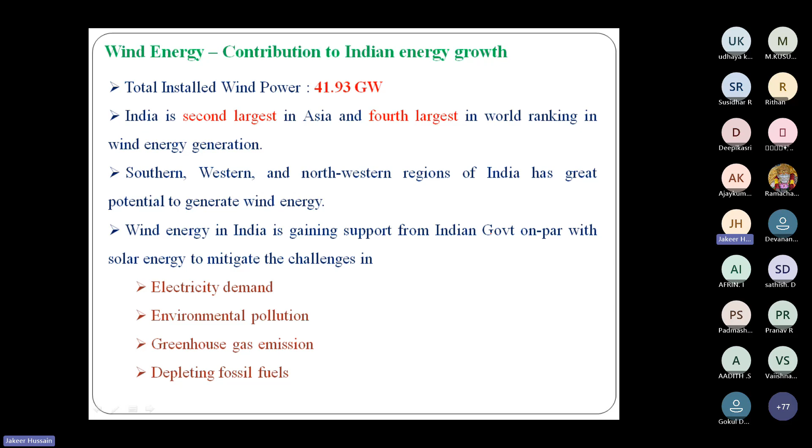We know the principle of the generator: it converts energy from mechanical form to electrical form. Whatever energy we get from the generator at the output port is unregulated electrical energy. What does unregulated electrical energy mean? It is purely based on availability of wind, and we know that wind flow is not constant, it is an intermittent source. So if the source is intermittent, the energy output also is not constant, and that's what we call unregulated electrical energy.

That unregulated electrical energy cannot be fed directly to our loads. So we need to modulate and regulate that energy according to the specifications of the loads, and for that we need a power modulating unit. We know that power modulating units are power electronic converters, and these converters regulate the electrical energy before feeding it to the electrical appliances, electrical loads.

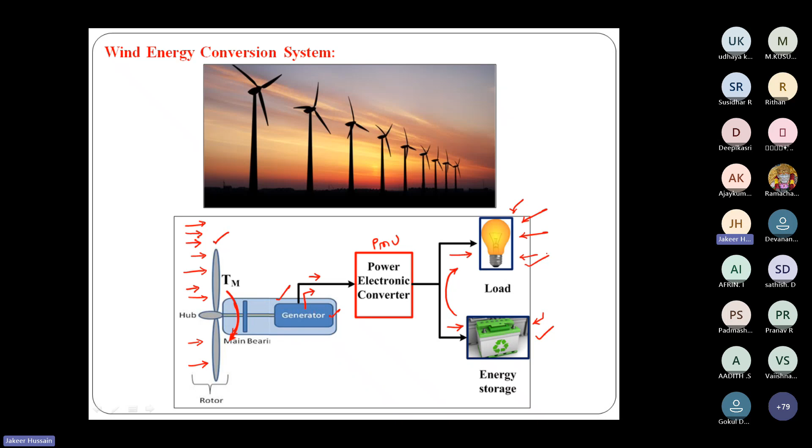These are all basic concepts. I know you may feel this is familiar, but I want to make you comfortable with these before diving into the actual wind energy conversion concept. So this is the basic of the wind energy conversion system, the main subsystems inside. Now we will see exactly what technology is involved in the energy transformation, the energy conversion process.

I hope you notice the structure of this device, it's a peculiar shape, just one object. If you place this object in any fluid flow, fluid meaning maybe liquid or air or gas, if you place this particular object to allow the fluid, the air, to pass onto the surface of this airfoil, this structure, then what will happen? Just guess, just visualize, just understand: what will happen if you place this shaped object in the air?

So the immediate effect is going to be this. Just observe: this particular structure has a leading edge, the initial point, and a trailing edge, the end point. Whenever air comes here, because of the obstruction at the leading edge point, these air molecules divide into two streams: one is the upper surface stream, another is the lower surface stream.

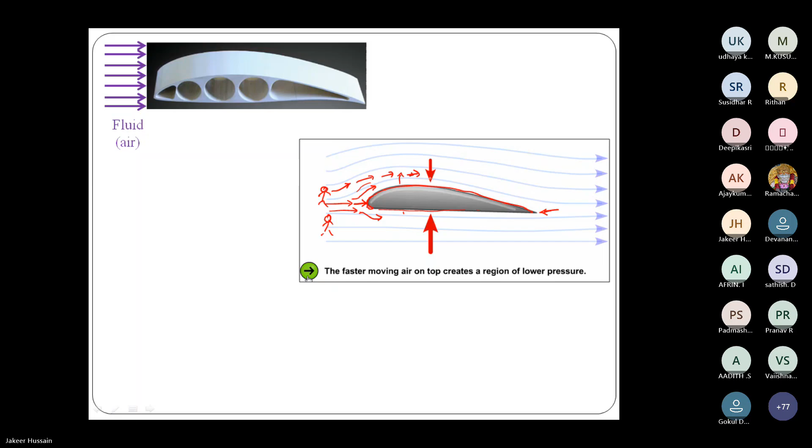But when you observe the geometry of this structure, at the upper surface, the length of the surface is somewhat more compared to the bottom surface length. This means that if air is dividing into two streams, the upper stream should travel more path compared to the bottom stream.

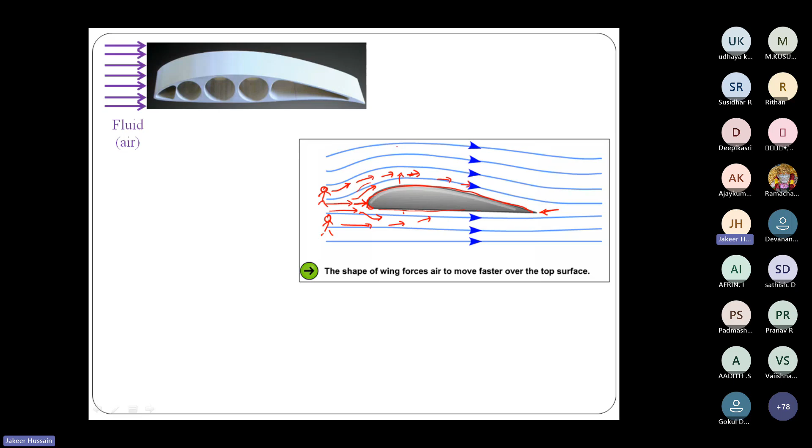But we have one concept, called conservation of mass flow. What is the meaning of mass flow rate? Whatever mass of air enters here, the same amount of mass will leave from here. This is called conservation of mass rate flow. It means whatever air particles enter at this point, all the air particles will reach this point at the same time. So the above surface particles and bottom surface particles will meet again at this particular trailing edge point.

So what it means is that these upper surface particles, to cover more distance, have to travel with more velocity when compared to the bottom surface air particles. So this is called velocity difference.

Whenever you create some velocity difference, obviously the pressure also will change above the surface and below the surface of the object, and it creates the pressure difference. We know that there is a relation between pressure and velocity: they are inversely proportional, inversely related.

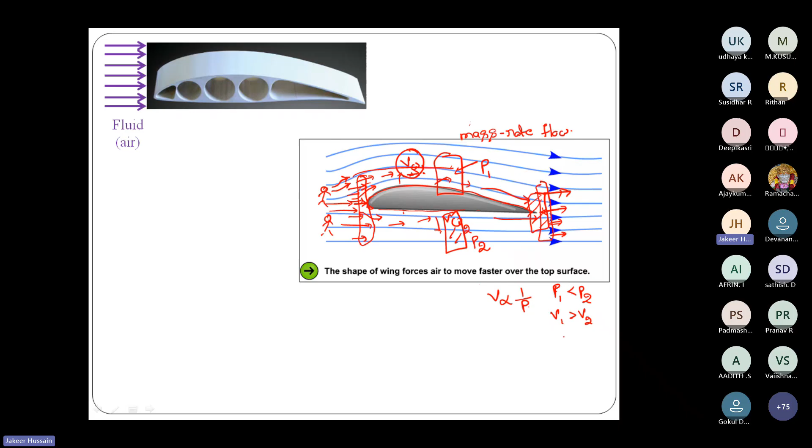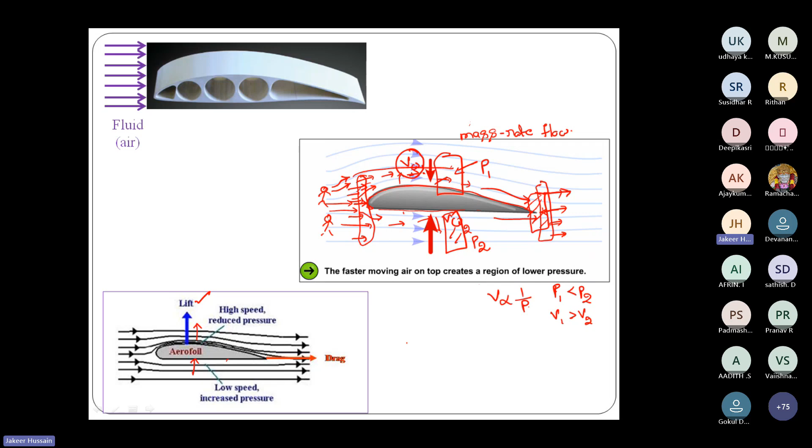This pressure difference will create one aerodynamic force, and that aerodynamic force we call lift force. How will that lift force act? We know that force will act from higher potential to lower potential. Because of that, this particular object will be lifted in the air, in the vertically upward direction.

This is the science behind this particular concept. So when you place an object in this particular geometry, whenever you allow some fluid to pass over this geometry, that object will experience some external force. That external force we call lift force, that aerodynamic force. The creation of lift force is very important in the generation of wind energy conversion systems.

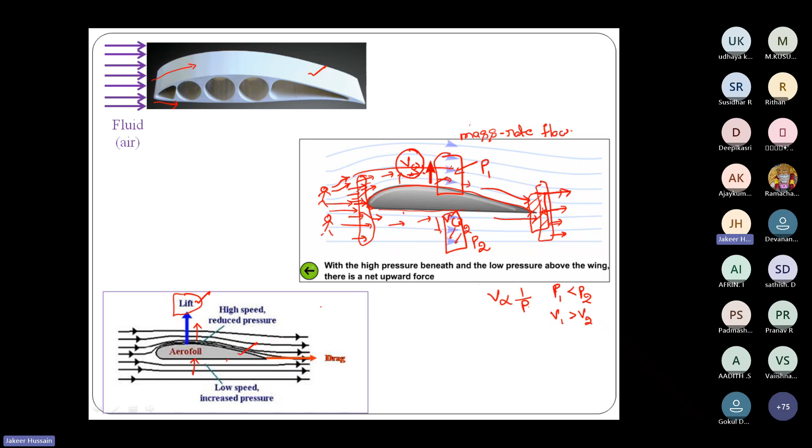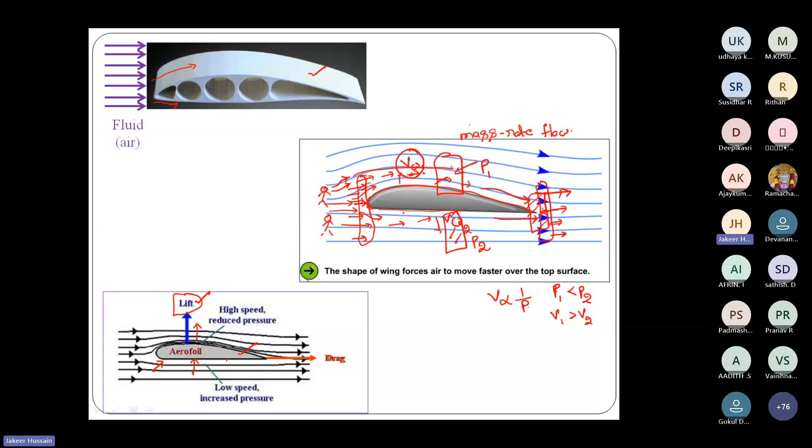I hope you can recollect that we use the same technology, the same concept, even in aircrafts. Whatever wing we design for aircrafts, all these wings are based on this type of structure. It's an aerodynamically efficiently designed structure, and that structure is called an airfoil.

So this is the definition of the term airfoil: it's a cross-sectional shape of an object that creates an aerodynamic force when a fluid is allowed to pass over it. A very simple shape, but that particular simple shape is revolutionizing entire engineering. That is the significance of this particular shape.

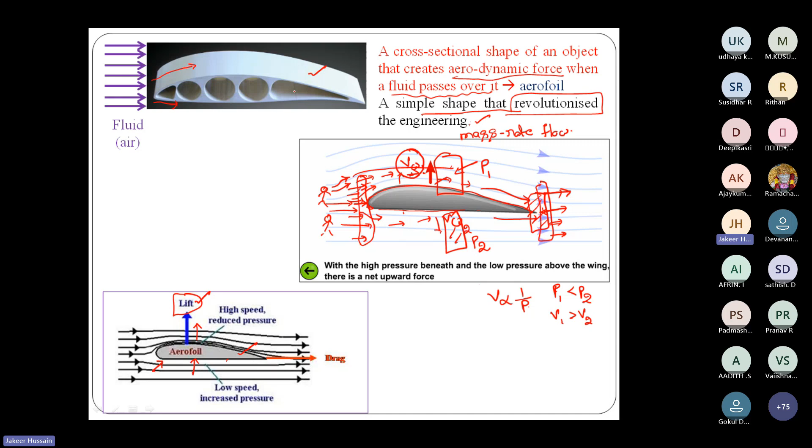So once you place that, it will create a pressure difference, and finally it will generate a lift force. This is a very important concept to enter into the wind energy conversion system technology.

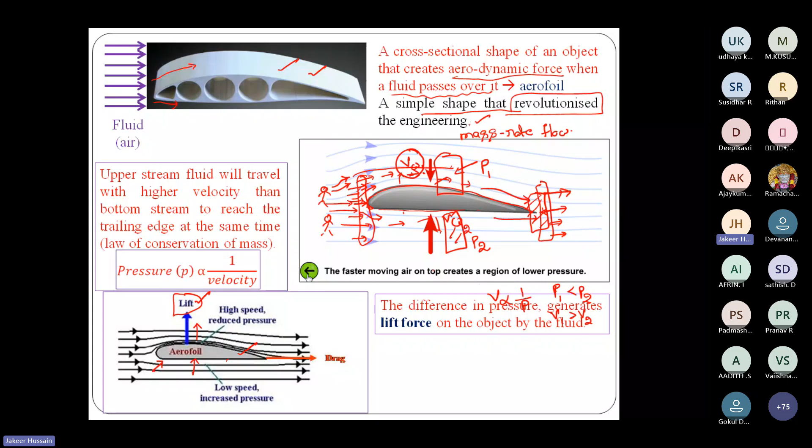Now that we understand what a lift force is, how can you make use of that concept at the micro level to rotate the entire length of the turbine blade? You can understand this from this particular slide. This is an aircraft wing, and you see the cross-sectional view of that aircraft wing is an airfoil shape.

So you can imagine a particular blade, whether it's a wind turbine blade or aircraft blade, is a stack of these airfoils. One wind turbine blade is a combination of thousands of airfoils like this.

When you place this blade in wind, based on the concept we just discussed, each airfoil will experience one external force, which is called lift force. Because of that lift force, all these airfoils, after experiencing their individual lift forces, the resultant force, the sum of all the individual lift forces, will make this turbine blade rotate or move down.

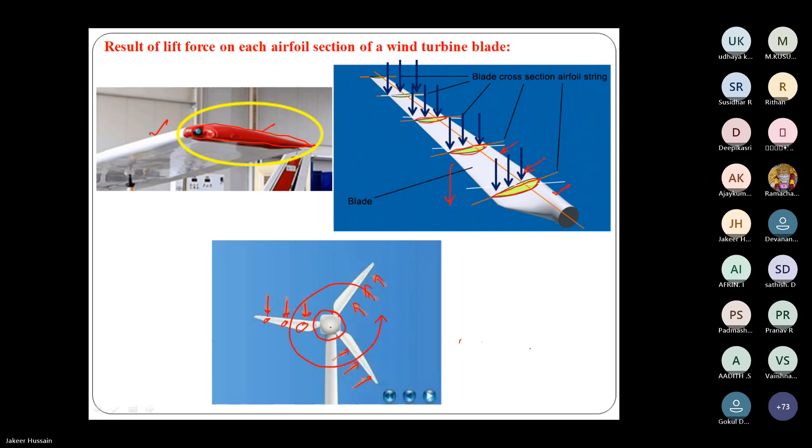What is the meaning of kinetic energy of the wind? We know that whenever wind is in motion, whenever there is some wind flow, it is because of its kinetic energy only. And what is the formula for kinetic energy? It is half mv square, where v is wind velocity and m is mass of the wind in kilograms. So this is the energy expression.

Then what about power available in the same wind? What is the relation between power and energy? It is the rate of energy that is called power. What is the meaning of rate of energy? It's dW by dt. The meaning of dW means kinetic energy I'm talking about, so it's d by dt of kinetic energy. So what is the formula for power?

It is half m dot. It is m dot, not simply mass, it is a rate of mass, the rate of mass, it is m dot, VW square. This is the power available in the wind.

Now something you should know about this mass flow rate. The formula for mass flow is rho A VW, where rho is called air density. The meaning of air density means how much mass in 1 cubic meter, it is kg per meter cube, that is called air density.

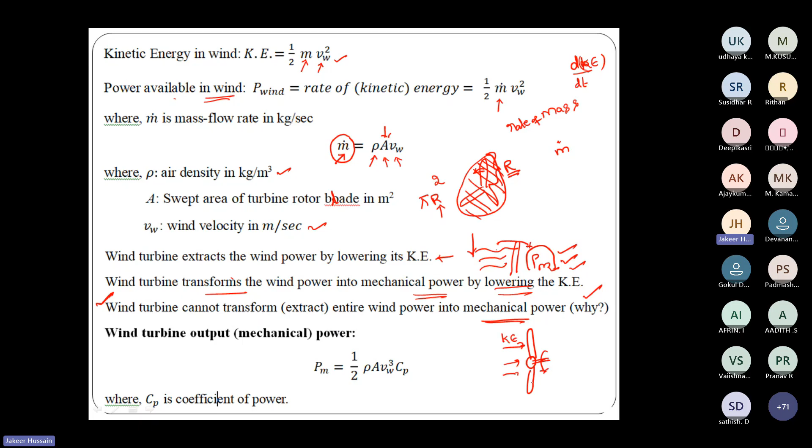Now this is a very important point you should understand. A wind turbine cannot transform the entire available kinetic energy in the wind into mechanical energy. Can anyone answer this question, students? Why can a wind turbine not transform the entire kinetic energy available in the wind into mechanical energy? Can anyone, just make it more interactive if possible?

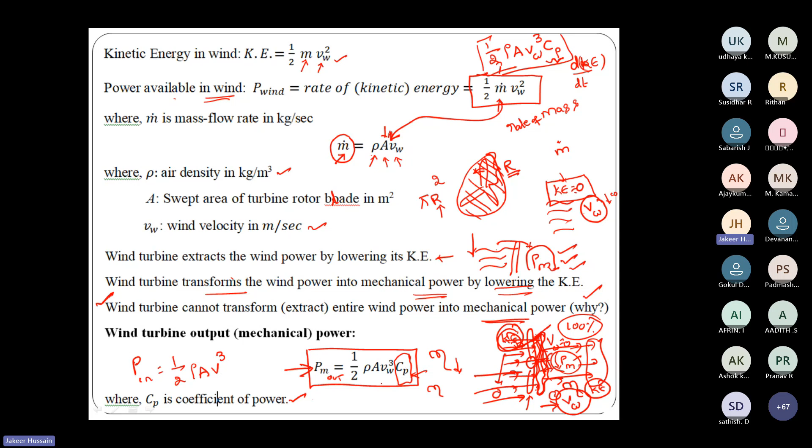So you should understand more about the term CP, coefficient of power. It is the ratio of wind turbine output power by wind turbine input power. There are a few concepts here — it is a derivation using the axial induction factor, alpha, called axial induction factor. But in this introduction lecture, I'm not going to discuss this alpha term. Just remember, there is a term called CP, coefficient of power.

And the maximum value of that coefficient of power is 0.593. Maximum value for that coefficient of power, or power coefficient, is 0.593, sometimes we call it 59.3%. So now you understand what 59.3% means: whatever input power is available in the wind, only 59.3% of that power we are extracting as output power. Maximum power you can extract from the input power is only 59.3%.

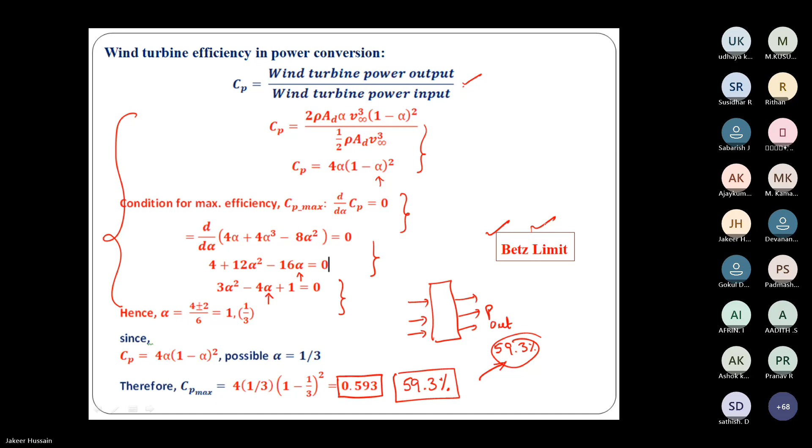This concept is called coefficient of power. So after understanding these basics, the expression for coefficient of power — there is one mathematical equation. That coefficient of power is a function of two different terms: one is called tip speed ratio, another one is called pitch angle. So coefficient of power is a function of tip speed ratio, which we call TSR, and pitch angle, which we indicate with beta. This particular expression will give you the value of CP.

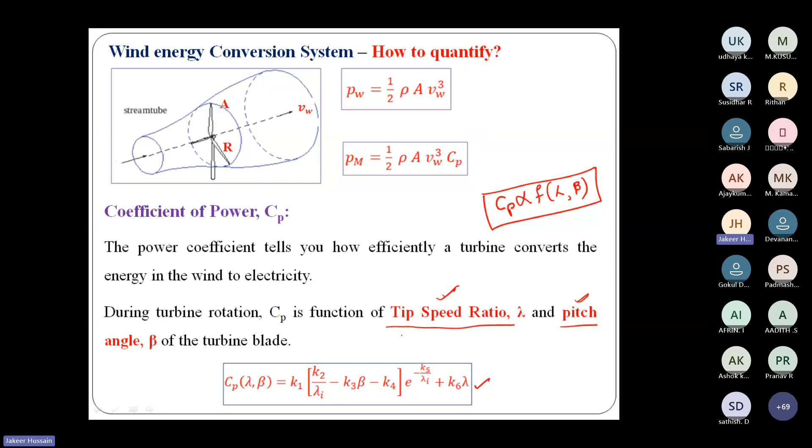It is a function of tip speed ratio and pitch angle. Now the question is, what is this tip speed ratio? What is this pitch angle? Tip speed ratio is a ratio of - when you allow the wind in this direction, the turbine will rotate with angular rotation. So if you take the tangential direction of that rotating blade, and that tangential direction wind velocity, the tangential direction speed of the tip of the blade - I'm repeating, the tangential velocity of the tip of the blade. I'm not talking about angular velocity, I'm talking about tangential velocity.

The tangential velocity expression is omega r into r. By the way, what is omega r? Omega r is nothing but angular speed of the wind turbine. And what is r? R is nothing but length of the blade. So the product of omega r into r will give you the tangential speed of the tip of the blade, divided by wind velocity. The ratio of these two terms will give you the TSR, tip speed ratio. This is a very important concept in wind energy conversion systems, so you have to visualize and understand this. What is tip speed ratio?

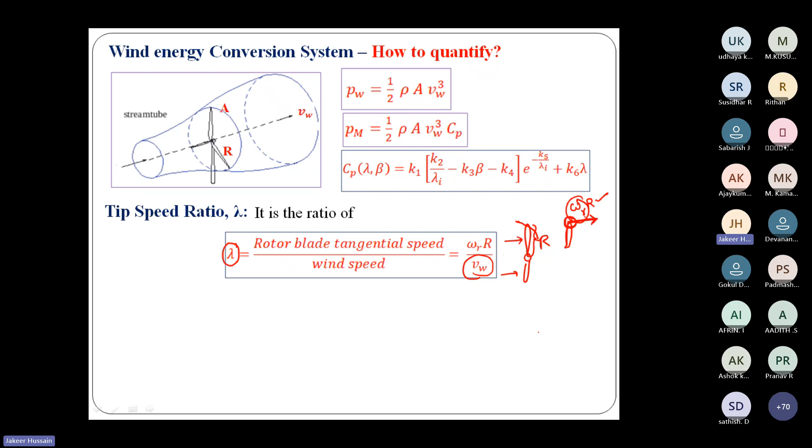Once you understand tip speed ratio, then what is pitch angle? This is a wind turbine - this is called hub, and these are wind turbine blades, attached like this. You can see this arrangement, where you can use a motor - this is our electric motor. This electric motor we can use to rotate this particular blade structure. You can rotate - rotation means not like our wind turbine rotation, it is a revolution. So you can make that blade rotate like that, only in this direction, not in this direction. So if you rotate like this, you can change the angle of that blade. That angle is called pitch angle.

To pitch, to rotate, to change the pitch angle of any wind turbine blade, we install a pitch drive motor. So just try to understand what is the meaning of pitch angle.

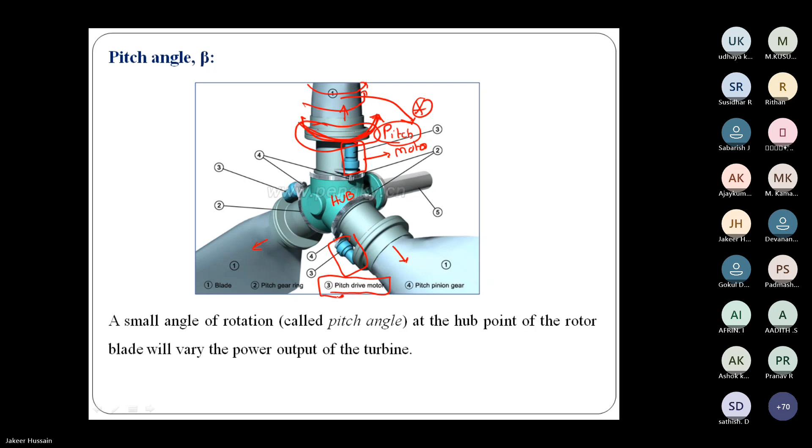Once you are clear about these two, here are the mathematical expressions we've discussed so far to model a wind turbine, wind energy conversion system. What is this? This is power available in the wind. And this is power extracted by the wind turbine. And this is the mathematical expression for coefficient of power - it is a function of tip speed ratio and pitch angle. And tip speed ratio is the ratio of the tangential velocity of the tip of the blade to the wind velocity. These are very important modeling equations if you want to simulate or work on a wind turbine.

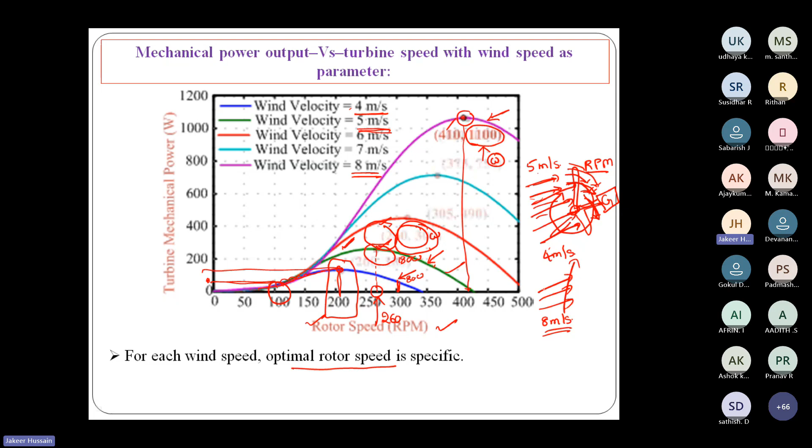So for each wind speed, there is one optimal rotor speed. It's a one-to-one relation. Whenever wind velocity changes from 5 meters per second to 6 meters per second, you should control the speed of the turbine to extract maximum power from the wind. This point is very important. That point will lead to the concept of maximum power point tracking.

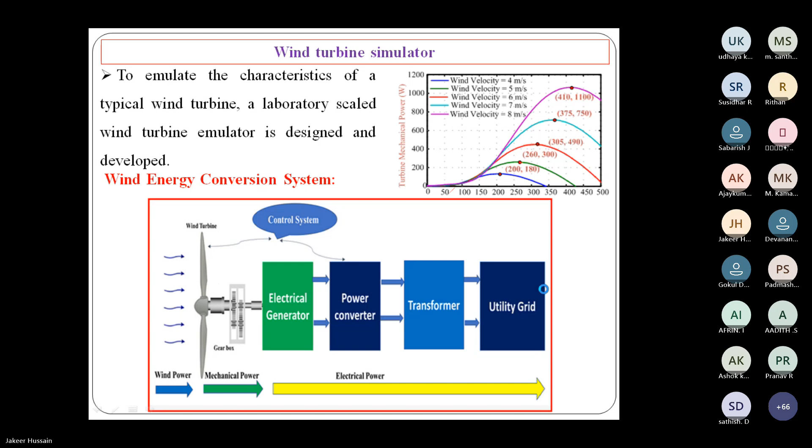Look at this. This is one hardware experimental setup. The experimental setup name is wind turbine simulator. What is the meaning of wind turbine simulator? To perform experiments, to conduct research on wind energy conversion systems, you cannot conduct research on real wind turbines, because when you conduct research on a real wind turbine, the incoming wind is not in our control. So to conduct research on a wind energy conversion system, you require constant wind speed for a certain amount of time.

Then only you can do some research. Then only you can propose the algorithms for that particular wind velocity. So the point is, whenever you want to perform any research or experiment on renewable energy sources, you don't do that research in the real field. You need to create one laboratory experimental setup to simulate, to mimic the characteristics of a real wind turbine. That particular setup is called a simulator. And this is the wind turbine simulator.

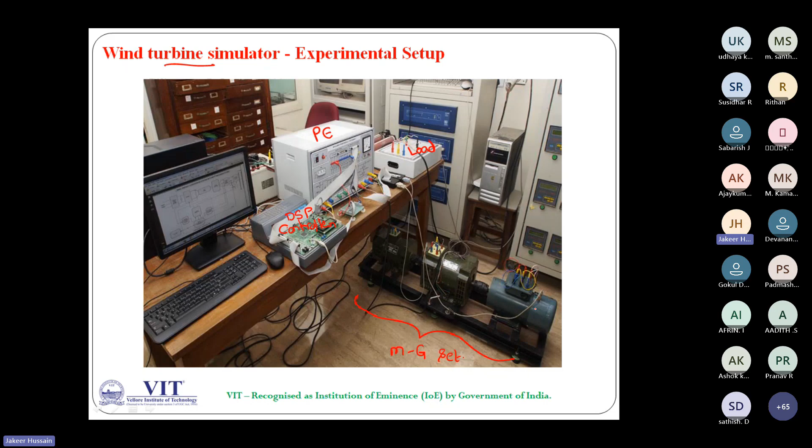So, this is called host system. What is the meaning of host system? In this host system, we will simulate the turbine. We will develop the control algorithm code, and that code will run on this DSP controller.

If you run the control algorithm on the DSP controller, it generates control signals, gate signals. Those gate signals you feed to this power electronic converter, and that converter's output is the input to the motor. So to control the speed and behavior of this motor, you need to control the power electronic converter's gate pulse sequence.

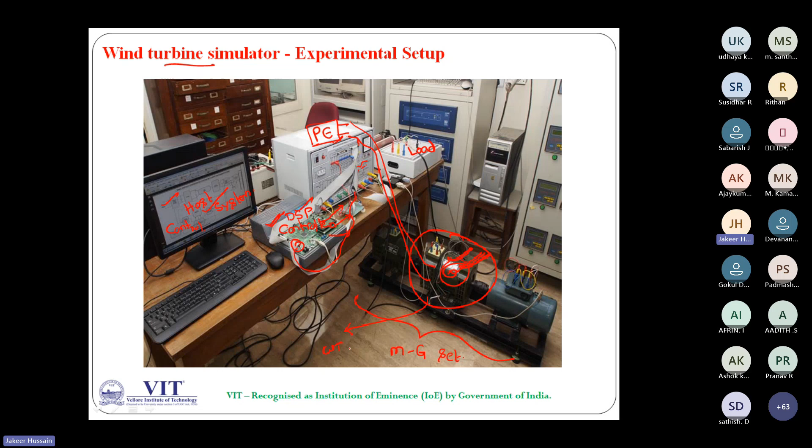So why are we controlling this motor? This motor will act as a wind turbine rotor. It behaves as if it is a real wind turbine, performing this type of characteristics. To obtain these characteristics, you should control that motor by using one power electronic converter.

So as if you have a wind turbine like this, the behavior of this electrical DC motor is the same as one wind turbine. That wind turbine shaft is coupled to the generator. So it is nothing but this PMSG generator, permanent magnet synchronous generator, coupled to one DC shunt motor.

This is the DC shunt motor. The DC shunt motor's main objective is to mimic the behavior of the wind turbine rotor, and the wind turbine rotor output is fed to the generator, called the PMSG generator. The output of the PMSG generator is fed to this electrical load.

So this is the experimental setup we developed in our laboratory to simulate the behavior of the wind turbine.

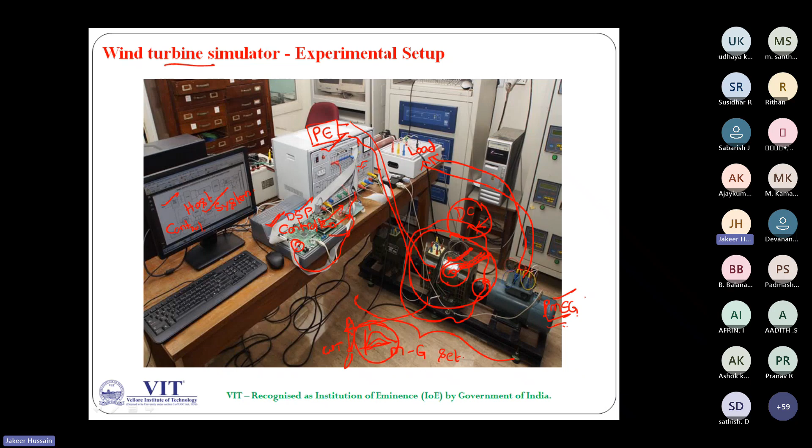But directly working on a wind turbine with hardware is not advisable. So first we need to simulate the behavior of the wind turbine by generating different control signals, and we should verify the performance of the wind energy conversion system through simulations. For that purpose, we need to develop simulation models.

So this particular window will show you the experimental results of that wind turbine simulator. Just now we have seen, at different wind velocities, the speed versus power characteristics. So these are the results of the hardware experimental setup.

So like I said just now, you should not start directly working with hardware. You have to work with simulation studies first, and for that purpose we need to create a simulation model that should implement one concept.

It is called the MPPT algorithm. That operation is called MPPT operation. What is the meaning of MPPT? It is maximum power point tracking operation, a tracking system, so as to extract maximum power from the wind.

What is the meaning of extracting maximum power from the wind? If wind velocity is 8 meters per second, then you should operate the wind turbine at this speed - then only you can get maximum power. If wind velocity changes to 6 meters per second, then you should operate the wind turbine rotor at this speed - then only you can get maximum power from the wind turbine. This process is called maximum power point tracking operation.

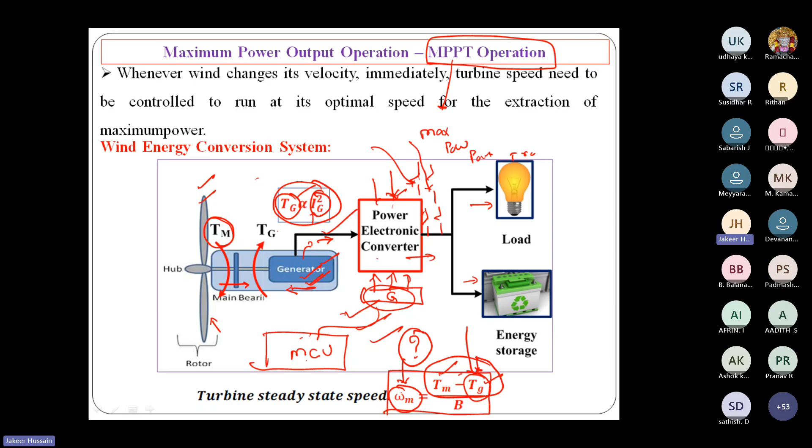This is the overall idea of a wind energy conversion system for MPPT operation. There are different algorithms available in the literature for maximum power point tracking.

Where does that maximum power point tracking algorithm come in this block diagram? Here it is. This algorithm will take the feedback signal, what is the wind velocity, what is the present speed of the turbine. Wind velocity is given by an anemometer, which measures the wind speed and feeds this information into the algorithm, along with the present rotating speed. Based on these two pieces of information, it will generate the appropriate control signals.

Those signals go into the power electronic converter. The design of this block is very important. That is what, as a researcher or student, you have to work on: how to propose, develop, and design a new MPPT algorithm, and how to implement it using a suitable control system.

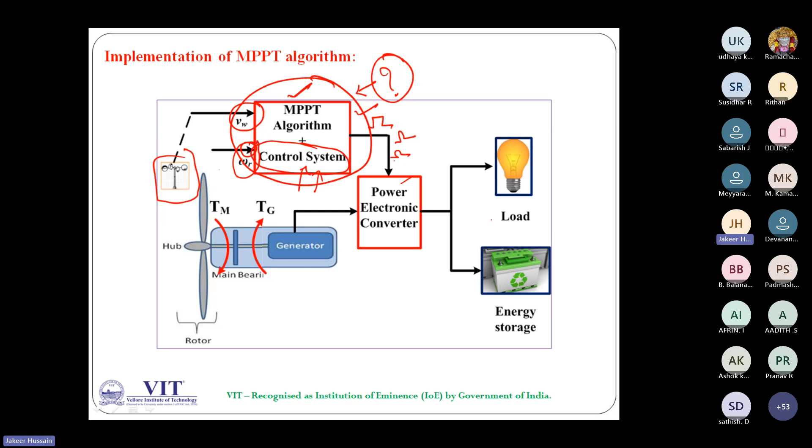As I said, there are many MPPT algorithms available in the literature, but conventionally three are very important: the tip speed ratio algorithm, the power signal feedback algorithm, and the hill climb search algorithm.

These are very conventional, popular algorithms. Nowadays people are going with ML-based algorithms, hybrid algorithms, adaptive algorithms, but all of these are derived from these conventional, primary algorithms. So you should start your journey with these: what is the TSR algorithm, what is the PSF algorithm, and what is the HCS algorithm.

One more thing you should know: the generators in wind energy conversion systems come with different topologies. Few wind turbines use permanent magnet synchronous generators, few use doubly fed induction generators, and very old wind turbines use induction generators. Most small power rating turbines use PMSG generators, while high power rating wind turbines use DFIG based generators. Nowadays we are not using induction generators; it is almost obsolete.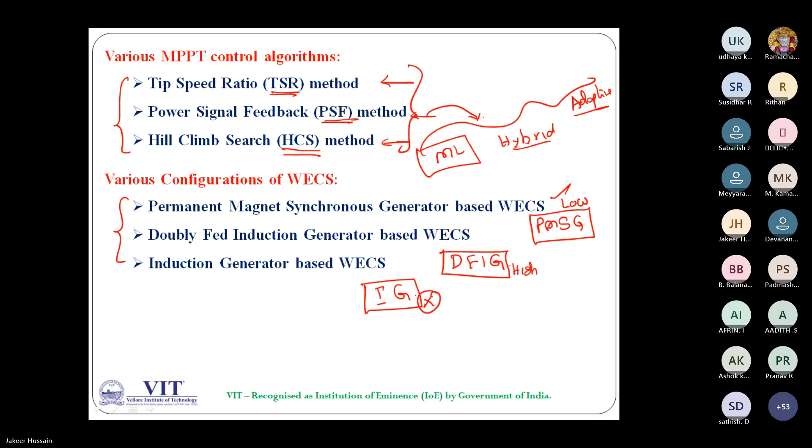So understand, DFIG based wind energy conversion systems or PMSG based wind energy conversion systems work like this. Now, to implement an MPPT algorithm on a DFIG based wind energy conversion system, here is the block diagram. This block diagram shows our turbine rotor connected to the generator, which is a DFIG generator, doubly fed induction generator. It has a stator and a rotor.

The stator winding you can connect directly to the grid, but the rotor winding connects to the grid through two converters, called the rotor side converter and the grid side converter. These are called back-to-back converters in the rotor circuit, coupled together and connected with a DC link.

So this is the power circuit, main circuit of our wind energy conversion system, DFIG based. But to control these two power electronic converters, you need to design a control system for the implementation of the maximum power point tracking algorithm. What is that control system? This is that control system, the remaining part, and the first thing is our MPPT algorithm.

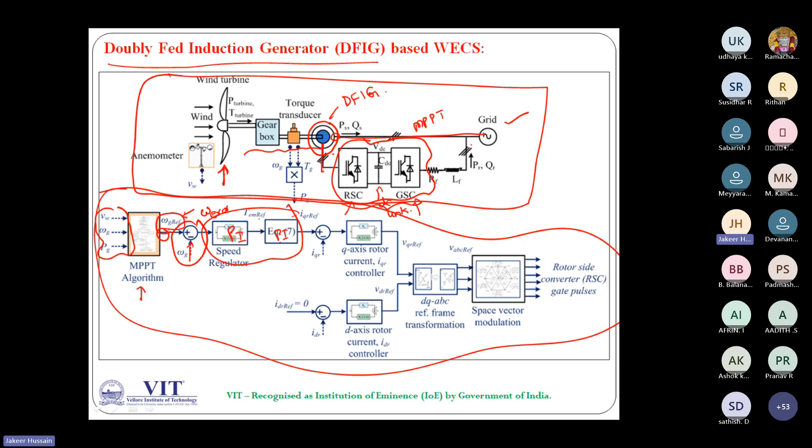For that purpose, we compare with the actual speed, present speed, and whatever mismatch we have, that error signal we feed to the PI controllers. From the PI controllers, there are two controllers we use: inner current controller, outer speed controller, and inner torque controller, outer speed controller. By using those two PI controllers, you can finally generate the reference signal for the rotor winding.

And that reference signal for the rotor winding, we perform the space vector modulation technique to generate the control signals for the converters. These control signals we feed to the converters.

So this is the simple view of a block diagram for a DFIG based wind energy conversion system with MPPT implementation. I'm not expecting you to know everything at this stage, but my objective is to make you aware of what is the main system, what is the control system, and what are the main important components in the control system. That is my objective, and that's why I explained it in brief.

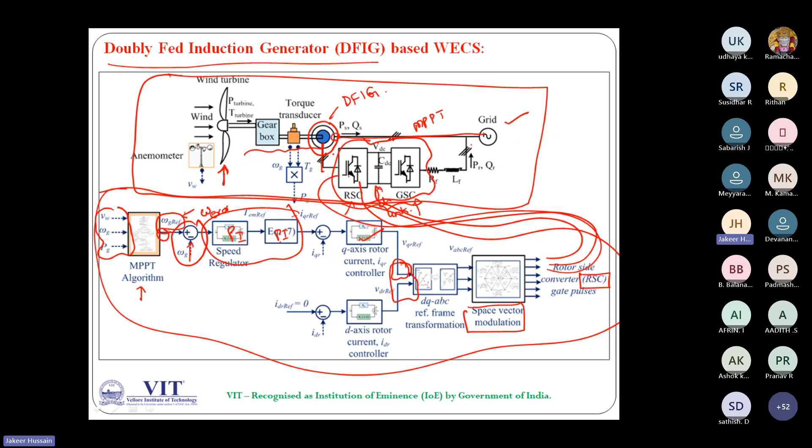So what are the things you should have in a block diagram of a DFIG based wind turbine? That particular concept you can implement on a MATLAB model. So this is a MATLAB model.

In this MATLAB model you see, first of all, the wind turbine, whatever mathematical modeling equations we developed. What are the mathematical equations we developed? 1 by 2 rho pi r square v cube Cp. This mathematical equation where Cp is a function of lambda and beta. These mathematical equations you have to implement in MATLAB.

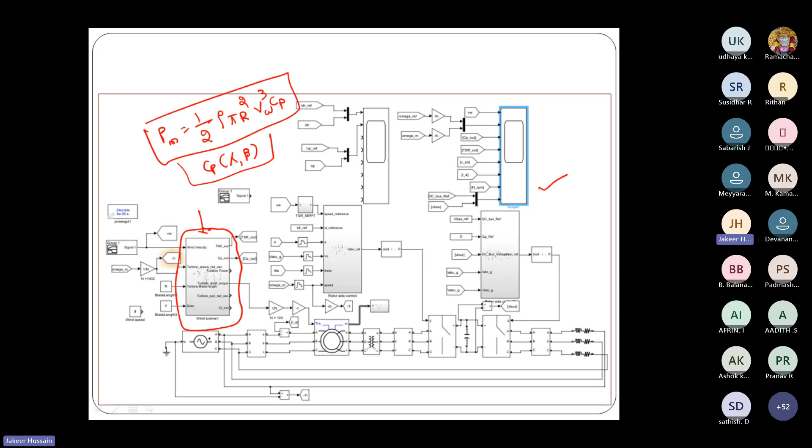Okay, so let me share my model. Here it is. Students, can you see my model on MATLAB? Yes sir, visible sir, yeah that's right. So this is the same model what I projected on the slide.

So this is what I said, the wind turbine model simulation equations, mathematical equations. If you double click on this, it will open the subsystem. In this subsystem you can see the implementation of all those equations: Cp implementation, Pm implementation, calculation of TSR. You just need to know the mathematical modeling equation, and in your own way you can implement it.

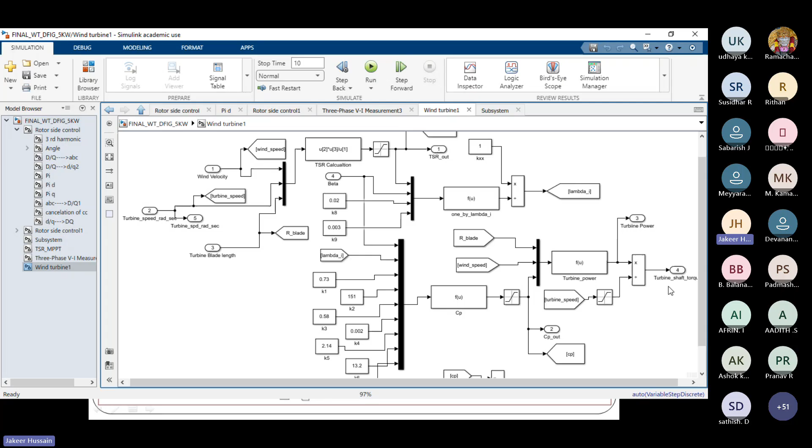You have different approaches to implement any equation in Simulink or MATLAB, so you can follow your own way. Finally, you have to make that subsystem give the output of torque. First you will get power, and knowing the relation between power and torque, you will get the torque output from the wind turbine block.

That torque output we feed to the generator. This is called the generator, and as I said, this is our doubly fed induction generator, which has stator winding and rotor winding. This capital ABC, I don't know whether it's visible to you, is the stator winding terminals, and this side, small abc, is the rotor winding terminals.

As I said, stator winding terminals are connected directly to the grid. Similarly, rotor winding terminals are connected to back-to-back converters: this is our rotor side converter, this is grid side converter, and this is the DC link. The grid side converter is connected to the grid again.

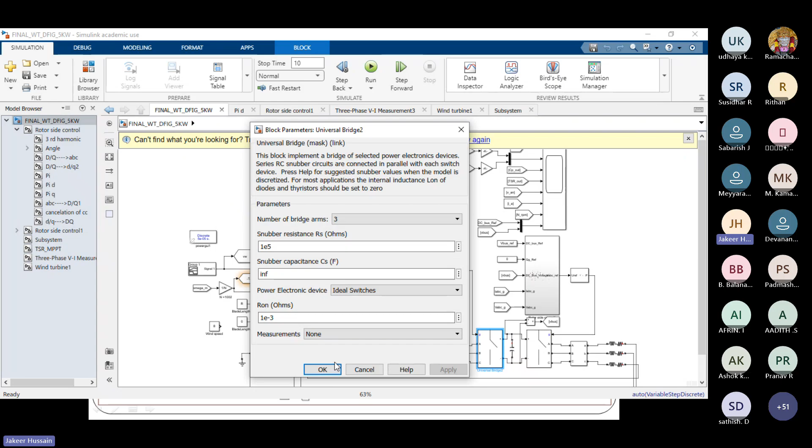So what is this power electronic converter? If you open the RSC, rotor side converter, you will see how to implement and design one power electronic converter in Simulink. You can take this universal bridge block to implement the rotor side converter, and similarly another block for the grid side converter implementation.

And how to generate the control pulses to these converters, you need another block. To implement and generate pulses for the rotor side converter, this is the rotor side control block. Similarly, to generate control signals to the grid side converter, you should have one more control subsystem for grid side converter control signals generation. So you will have two different subsystems: one for rotor side converter control and one for grid side converter control.

If I open this rotor side converter control, these are the main blocks inside it. As I said, you'll have two PI controllers: one is the inner current controller, another is the outer speed controller. Inner torque controller, outer speed controller.

After that, you implement transformations from the rotating frame to the stationary frame, DQ transformations. What is the importance of DQ transformations? It is to avoid the change in the inductance value, the change in the mutual inductance value. So everything should appear like a stationary thing. There should not be any rotating thing, relatively speaking. That is the objective of the transformations.

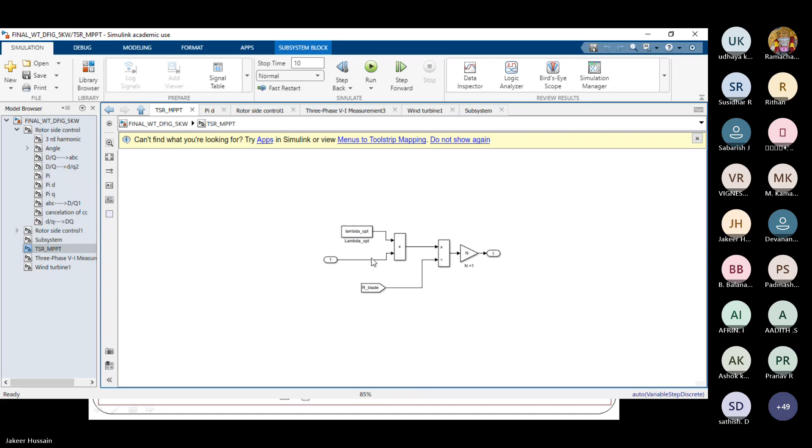To control this speed, here I have implemented the TSR algorithm. The input for the TSR algorithm is wind velocity. So take the TSR algorithm, implement it in this block, so that this block will generate the reference signal for the speed, called the speed reference.

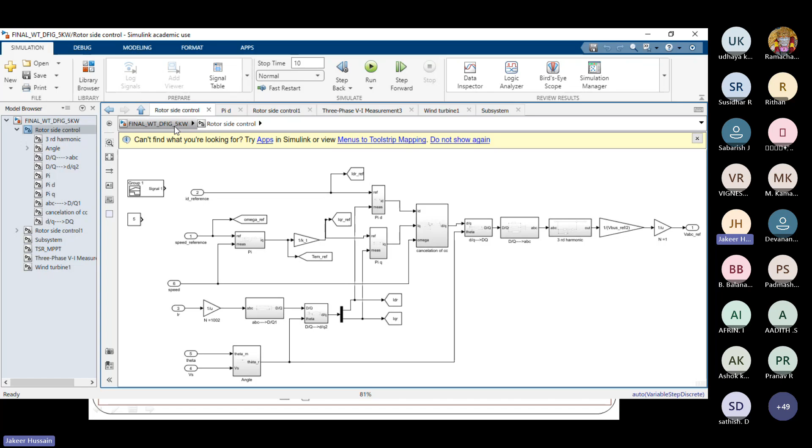With that speed reference, you have to design and implement our internal subsystem of the rotor side converter. If I get the opportunity next time, I'll be happy to share information on how to design the algorithm and develop the model. But this particular discussion will confine only to the introduction level. So like this, you can develop the control system subsystem, the control blocks for rotor side converter control.

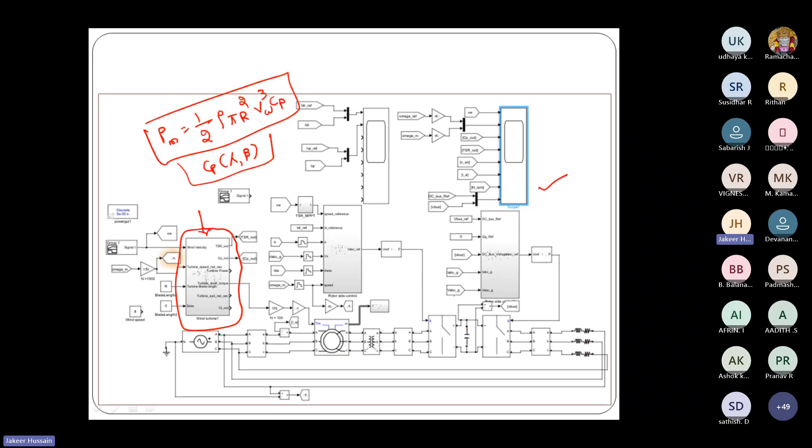Similarly for grid side converter control. So that's what we are back to here. Once we implement that and run the simulation, this is going to be the output.

If you look at the simulation model, these are the different inputs I am feeding to the scope block. The first one is wind velocity. And what is wind velocity? Wind velocity I'm feeding here. This is wind velocity and this is wind velocity.

If I open the signal builder, this is the way I am changing the wind velocity randomly. For the duration of 10 seconds, initially I made the wind velocity 8 meters per second from 0 to 1.5 seconds. Then I changed it from 8 to 9.2, and made it constant up to 2 seconds. Then at 2 seconds, I changed the wind velocity to 10 meters per second, maintaining it for the duration of 1 second from 2 to 3 seconds.

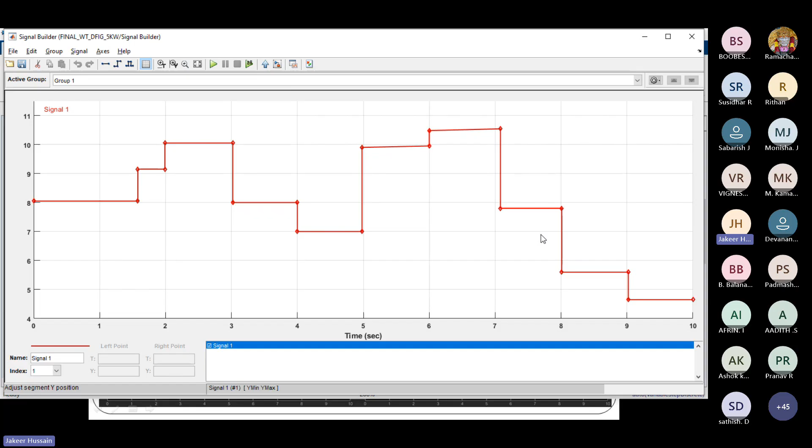Like that, I changed the wind velocity input. This is the case in our wind turbine - wind velocity is not in our control, it will change randomly. That type of behavior you can emulate and simulate using the signal builder block. By changing the wind velocity stepwise, you can also change it linearly, or in any manner you want. Use this signal builder block to give the desired shape of the wind velocity profile, then feed that shape to the simulation model.

That is what you can see in the results. The first one is that wind velocity. And what is the second one? If you look at this second one, in the scope.

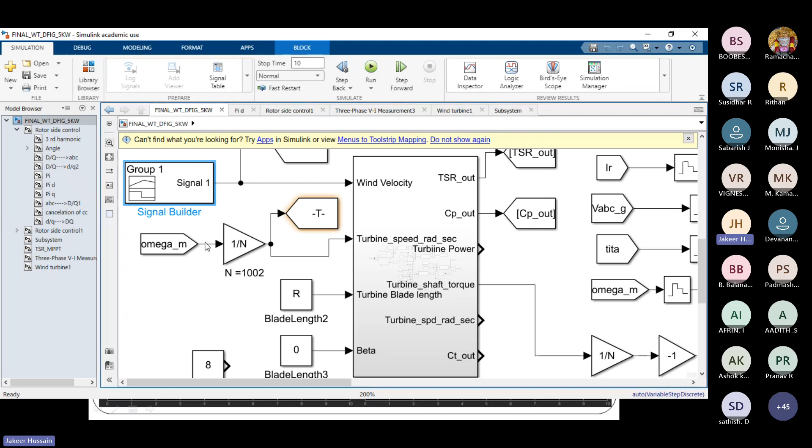Second one is omega reference and omega m. This means how exactly your control system is tracking the reference speed. Wind velocity is 8 meters, 10 meters, but reference speed is 500 RPM, 1000 RPM, 1500 RPM. Like that, reference speed is changing. Whenever there is a change in the reference speed, how are you generating this reference speed?

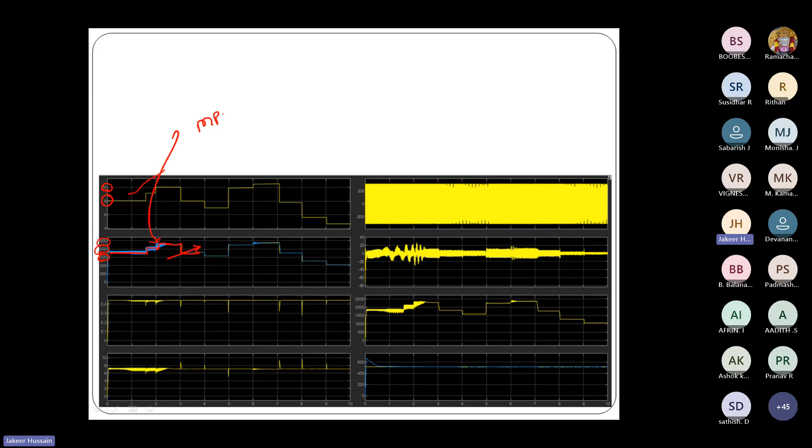By using the MPPT algorithm. Your MPPT algorithm will generate the reference speed, and that reference speed you should track. Even this tracking you can see here. Actually, here you have two plots: one is reference speed, another one is actual speed. You can understand here.

For the second input to this simulation scope block, I'm feeding two signals, omega reference and omega m. From this plot, you can say that my system is exactly tracking the reference speed. What will happen if you track the reference speed? Your system will operate at maximum power point always, even though wind velocity changes like this.

How can you say the system is operating at maximum power point? You have to monitor the value of CP, and that is what this third plot shows. CP is continuously at 0.47. You can see this value. Why CP is at this value, in my system, if you see CP versus TSR...

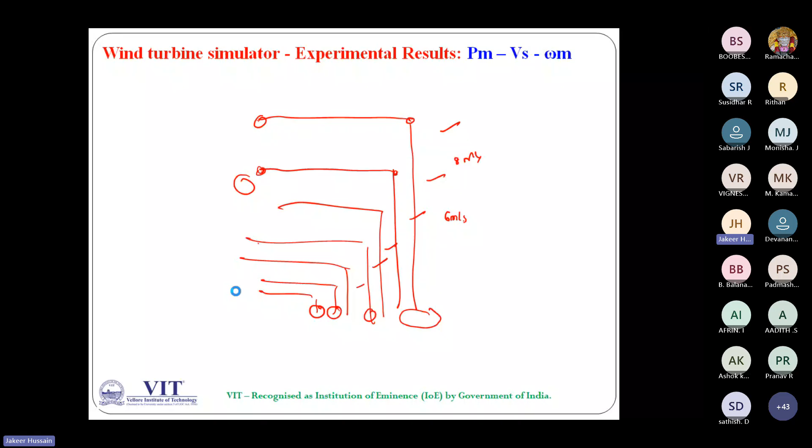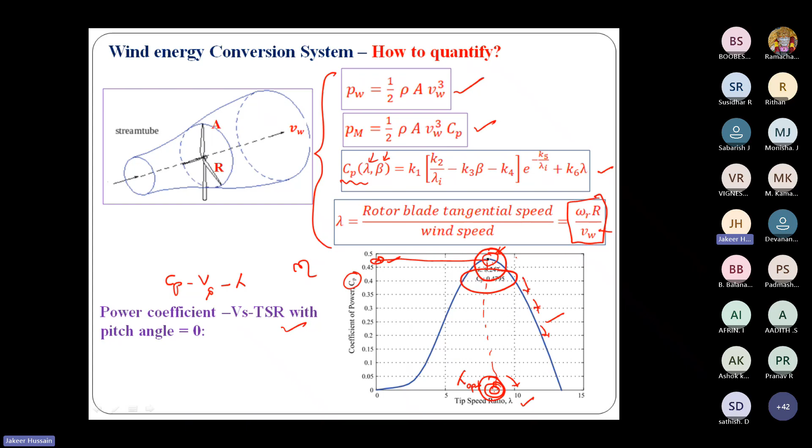I'm talking about this CP versus TSR curve, the maximum value is 0.47. So maximum CP value my system will go up to is 0.47, and that is what I'm getting in this simulation, 0.47, not 0.42, it is 0.47. This is the proof you can use to say whether your system is operating at the maximum point or not.

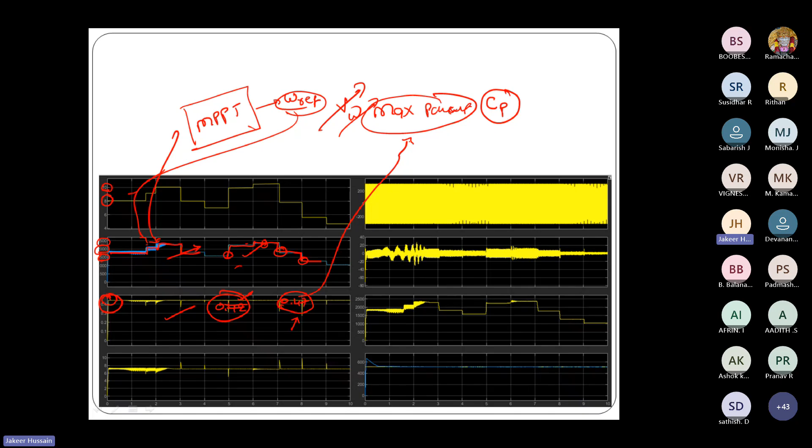What is the third one? Third one is the TSR value. We are exactly maintaining the TSR value at around 7.2. This is the optimal TSR.

And these are all: this is DC link voltage, this is the speed of the generator, this is the torque of the generator, and this is the generator output. Like this, you can simulate the system and inspect all the plots, so that once you verify your CP is maintaining at its maximum value, you can say that your system is working fine.

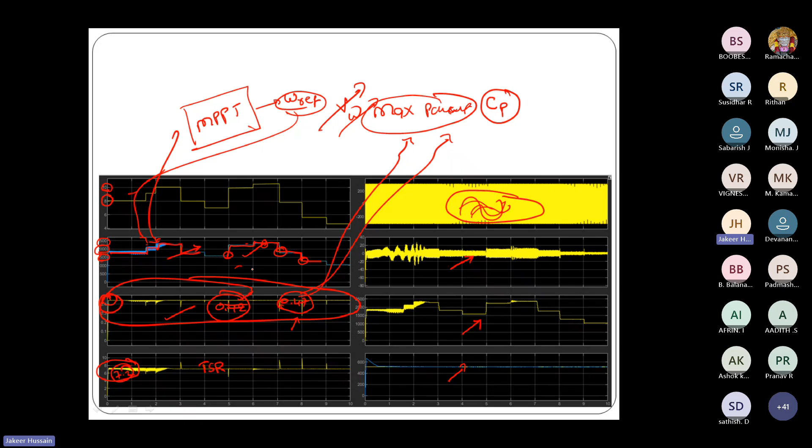So now I can go for hardware implementation. With that conclusion, you can shift from simulation studies to hardware system implementation. Like this, you can design, work, and perform research activities on wind energy conversion systems in your laboratory. These are a few publications based on my work, and I'll be very happy to take any queries.